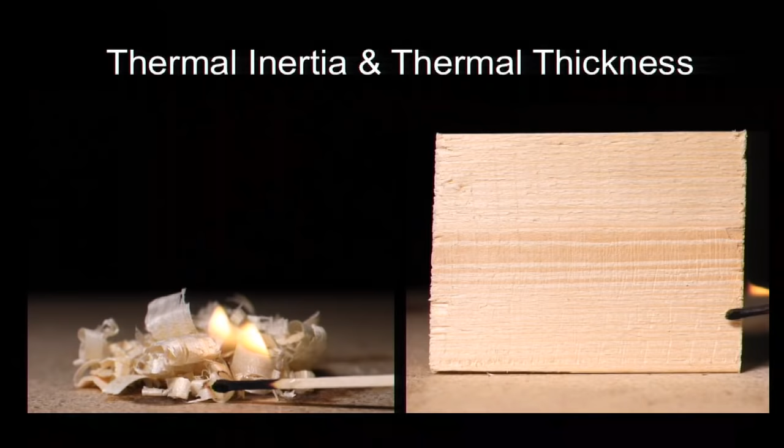The difference between these two cases, as regards both ignition of a material and the chances that it will continue to burn, are shown in these side-by-side videos of wood shavings and a block of wood, in both cases ignited by a match. And I'll play this now. And you can see actually multiple attempts to ignite the block of wood with subsequent matches.

You get the point, I hope. For a thermally thick fuel, when exposed to a heat source, the surface temperature of the solid material will begin to increase. The rate of increase is determined in part by the physical properties of the material.

The key parameters in this situation are, first, the thermal conductivity of the material. This is a measure of the ability of the material to transfer thermal energy internally by conduction. Second, the density of the material, and this is a measure of the material's mass per unit volume. And third, the material's specific heat capacity. And this is a measure of the amount of energy required to increase the temperature of 1 kilogram of the material by 1 degree Celsius.

A heat transfer analysis can show that the product of these three parameters, thermal conductivity multiplied by the density multiplied by the specific heat, governs the rate at which the surface temperature of a solid material increases when exposed to a heat source. This is called the thermal inertia of the material. And it represents, if you like, the ease with which the surface temperature of a material will change when exposed to heating.

However, the heat of combustion on its own does not give any information regarding the rate at which energy is released after a material is ignited, nor does it account for the heat transfer processes that lead to ignition, the material geometry, or the physical changes that may occur, all of which also affect a material's burning behavior. To give you a sense of the variability of heats of combustion amongst materials, this chart shows the heats of combustion of a number of familiar and not so familiar but relevant materials.

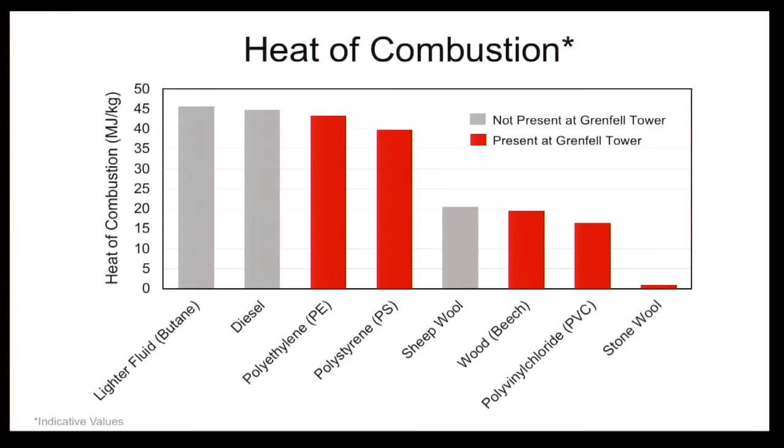Materials with gray bars are common and in some senses familiar, but are not considered significant as regards my preliminary evidence related to the Grenfell Tower fire. These are shown because these materials may be familiar to you, you may have some understanding of how they react to heating. Whereas materials in red are less familiar, aside from wood, of course, but were present in significant quantities within the cladding system at Grenfell Tower. You may note the broadly similar values for the synthetic polymer or plastic materials, polyethylene and polystyrene, as compared with diesel fuel, for instance. I'll return to this point later on.

Next, heat release rate. As I've mentioned, the rate at which energy is released from a material, by which I mean whether the available energy is released quickly or slowly in a given set of circumstances, is described by the heat release rate. The heat release rate describes the rate of energy release per unit time as an object burns. Objects made from materials with the same heat of combustion may burn in very different ways once ignited.

At a material level, the heat release rate behavior is dictated to a large extent by the pyrolysis behavior of the solid material. If the material melts, such as in the case of the synthetic polymer material polyethylene, for example, then after ignition, the heat release rate will increase to an essentially steady value until virtually all of the material is consumed. And this is illustrated schematically in the left-hand figure shown here.

This is a key point, and I'll return to burning of polyethylene, which I abbreviate in some cases PE, later in my presentation. If, however, the material chars, such as in the familiar case of wood or the less familiar case of a thermosetting polymer foam insulation, which I will also return to later, then under most conditions there will be an initial period of high heat release followed by a period of lessening heat release rate. This is due to the formation of a protective char layer on the surface of the material, and this is illustrated in the right-hand figure shown here. The formation of the char layer decreases the rate of energy transfer into the material, and hence reduces the rate of pyrolysis and therefore the quantity of flammable gases produced.

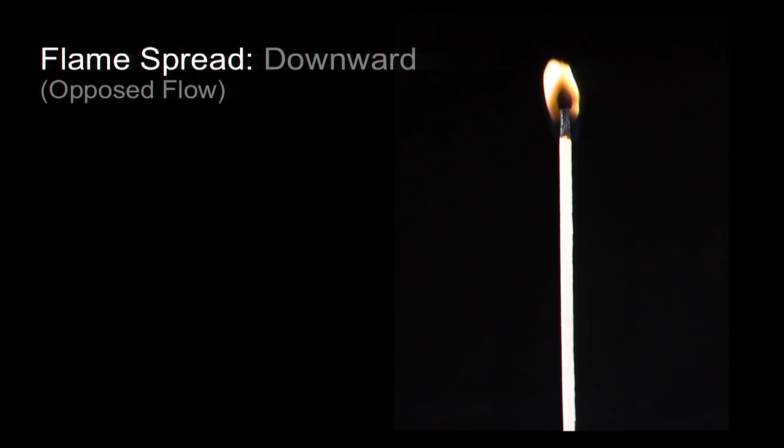And you can just see the flame creeping down the matchstick very slowly. And there you can see insufficient pyrolysis gases being released to sustain the flame.

A further special case of opposed flow flame spread is horizontal or lateral flame spread. This is similar to downward flame spread, and my next video shows the flame spreading from right to left. In this case, the rising hot gas draws air into the flame from left to right, hence referring to this as opposed flow flame spread, as in the case of downward flame spread.

The heat transfer from the flame to the match is higher than in the downward case, as evidenced by the spread of the flame horizontally along the match. In this case, the rate at which the pyrolysis front advances is approximately equal to the rate at which the solid fuel is consumed, as evidenced by a steady movement of the flame from right to left and a flame with a reasonably uniform size. And I'll show this here. And that flame just continues to the left and off the screen.

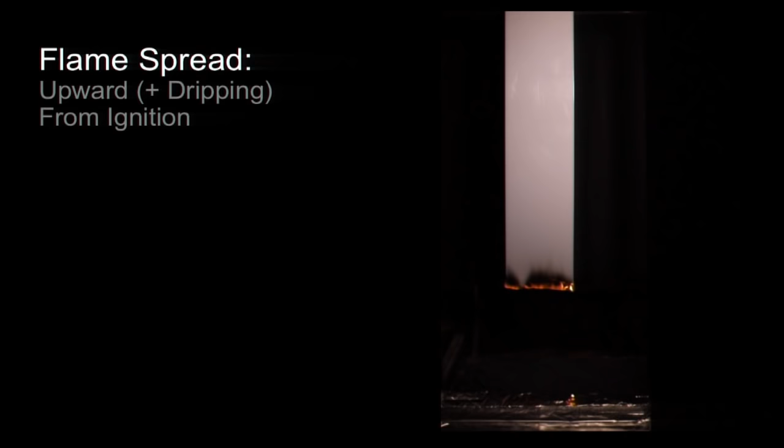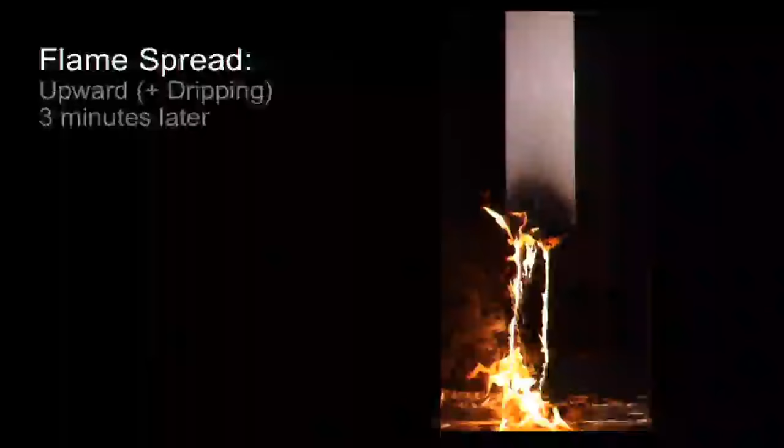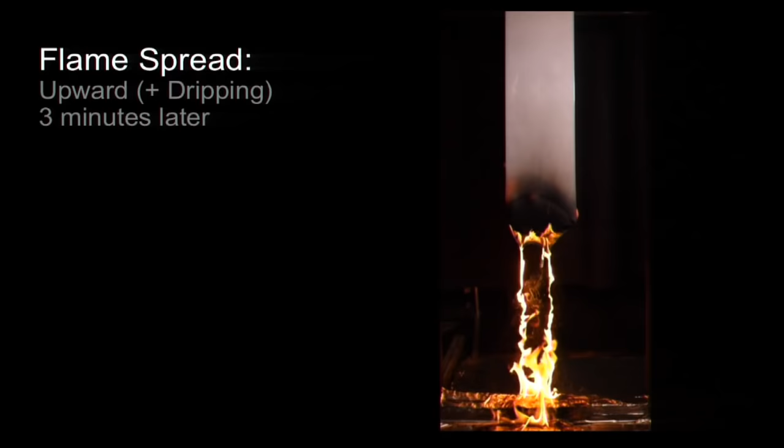In the second segment, which begins about 3 minutes later, we see that the sample is burning on both sides and that there is an almost constant flow of molten, burning polyethylene falling from the sample to the floor. And I should point out that the vertical streaks are rivulets of melted, burning polyethylene. In the third segment, which begins about 6 minutes later still, the sample has been significantly consumed and molten polyethylene continues to fall.

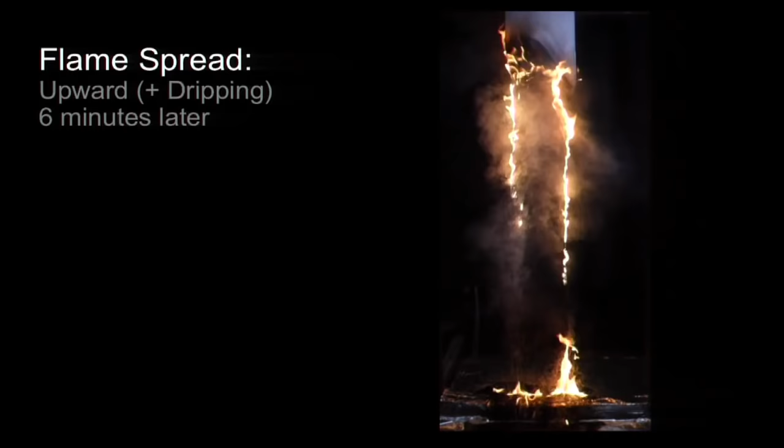The fact that polyethylene burns in this manner is not at all surprising. This behavior has been well known and documented in the scientific and technical literature for decades. This particular issue will become very important later in my presentation when I discuss the fire spread that was observed on the exterior of Grenfell Tower.

I've now spent considerable time discussing the most important fundamental fire science concepts and terminology relevant to developing a physical understanding of the circumstances of external fire spread during the Grenfell Tower fire. It is very important to note that my presentation of concepts such as ignition, burning, and flame spread relate primarily to single materials rather than to composite products. By this I mean products that are composed of a combination of materials, all of which may display substantially different flammability and flame spread properties.

I should also note that very little useful fundamental experimental data are available in relation to flammability and flame spread on composite products, since most of these products violate the basic assumptions of many of the existing experimental and compliance testing methods. And this issue is of particular relevance to this inquiry, not least because of the large number of other buildings in the UK and internationally that are apparently clad using similar materials and products to those used at Grenfell Tower. Despite this disclaimer, a series of useful conclusions can be drawn on the basis of the discussion provided in this first section of my presentation today.

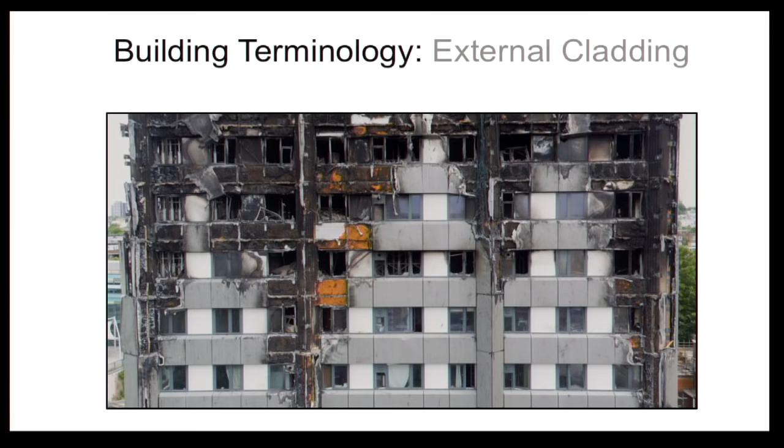This image shows a portion of the west face of the building following the fire. This photo was obtained by the Metropolitan Police Service using a drone on the 25th of July 2017. During my presentation, when I refer to columns, these are the areas of the building indicated on this image. I should like to point out that the east and west faces of the building each have 4 column lines, as shown here, whereas the north and south faces of the building each have 5 column lines, as noted by Mr. Millett during his opening remarks.

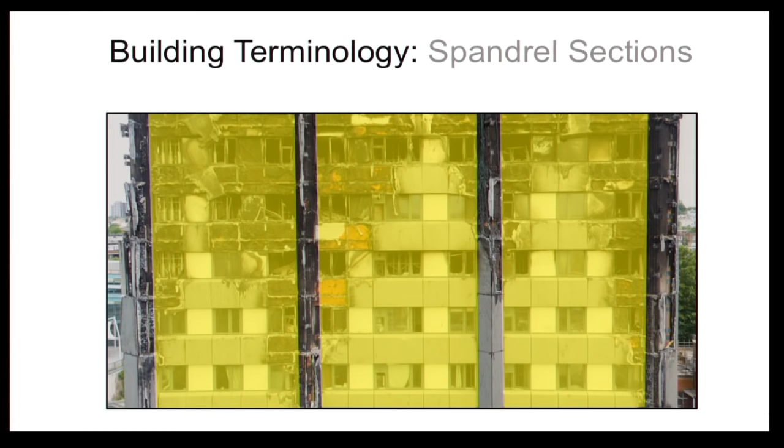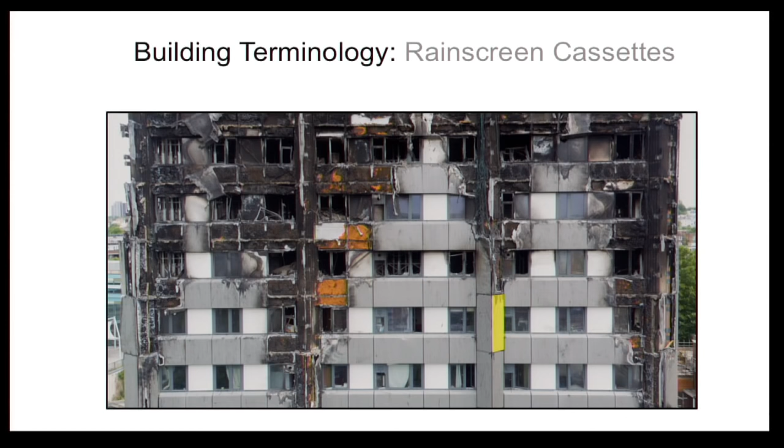When I refer to spandrels, this is a generic term that I use for the parts of the building between the windows, as indicated on this image. I also use the terminology spandrel section to refer to the building exterior between the column lines, the sections shown here. When I refer to rain screen cassettes, these are the external panels as indicated on this image. For example, here are spandrel section rain screen cassettes, and here on the column sections of the building. It's worth noting that these are gray in color from level 4 upwards.

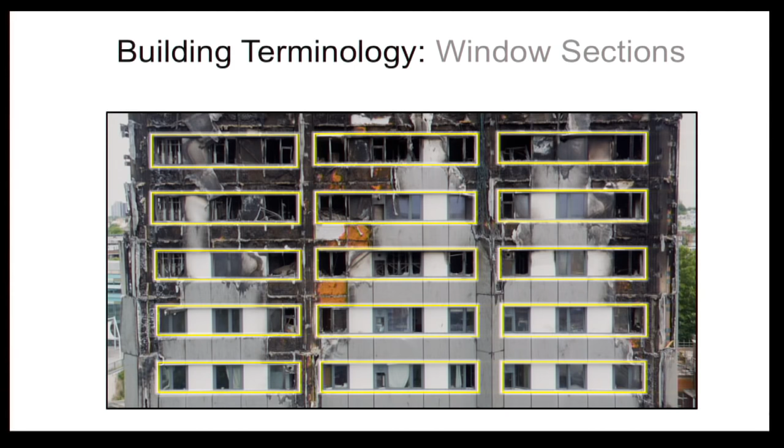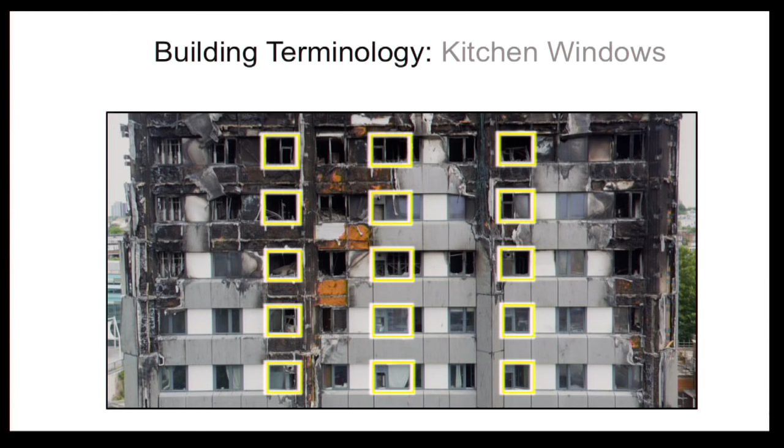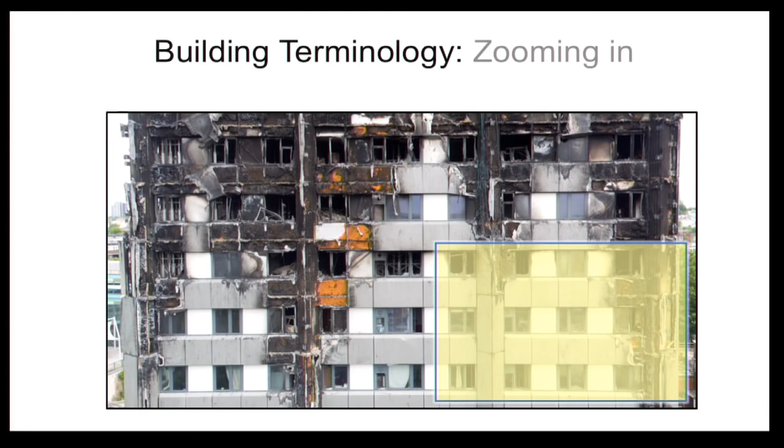I will now describe the cladding system and its geometry in more detail by zooming in on one specific part of the building, specifically the section shown of the building's exterior, which I'm showing here. This part of the exterior has the same arrangement of windows. Sorry, there it's zoomed in. This part of the building has the same arrangement of windows as those around the external east wall of flat 16, which is acknowledged by at least 3 of the inquiry's experts as the room of fire origin. The internal layout of this particular flat is also the same as that in flat 16, approximately, so that this is a kitchen window. The kitchen window is on the left, and the 2 rooms to the right of the kitchen window are associated with the living room.

I'll now zoom in even further to look only at the region around the kitchen window, which is shown as highlighted there. Here I've highlighted one of the kitchen windows in the vertical line of flats in the tower ending with the number 3. These are flats positioned in the southwest corner of the building. I will now zoom in even further to the kitchen window specifically.

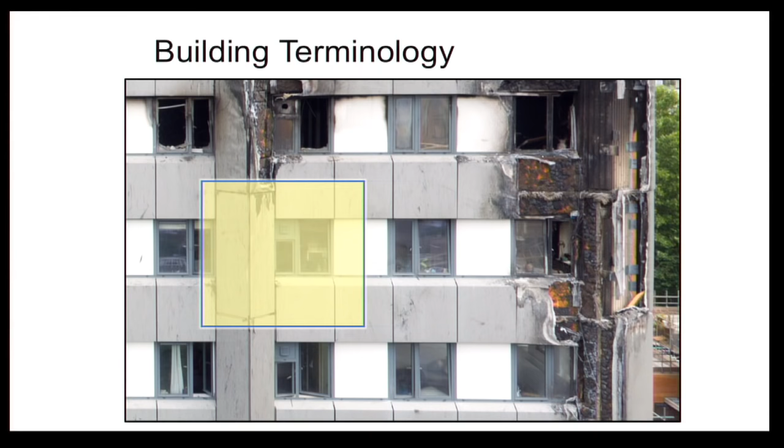The window comprises a large glazed window pane, which operates in both an inward tilting or inward turning, by which I mean swinging, manner, and hinged on the right when observed from outside the building. An extract fan, which is mounted within an infill panel, and this infill panel appears to be made from the same materials and construction as the window infill panels that I noted previously, and I'll come back to these in a moment. And a small glazed window pane beneath the extract fan and mounting infill panel, which operates in an inward turning manner and is hinged on the left when observed from outside the building.

I'd now like to look in some detail at the composition and geometry of the cladding in various locations around this kitchen window, which has the same design as the kitchen window of flat 16, as I've mentioned. To do this, I'll use my own hand-drawn sketches of the relevant sections through the building. And these are based on my own post-fire investigations at Grenfell Tower, and I'll do this in the hope that my sketches will be more easily understood by you and by the other parties to the inquiry.

I will necessarily be covering some of the ground already covered by Dr. Lane and Professor Nic Daéid. However, I believe that this is a useful repetition and that a detailed focus on the cladding materials and geometry is warranted under the circumstances. It should be noted that my sketches are only indicative and are not to scale.

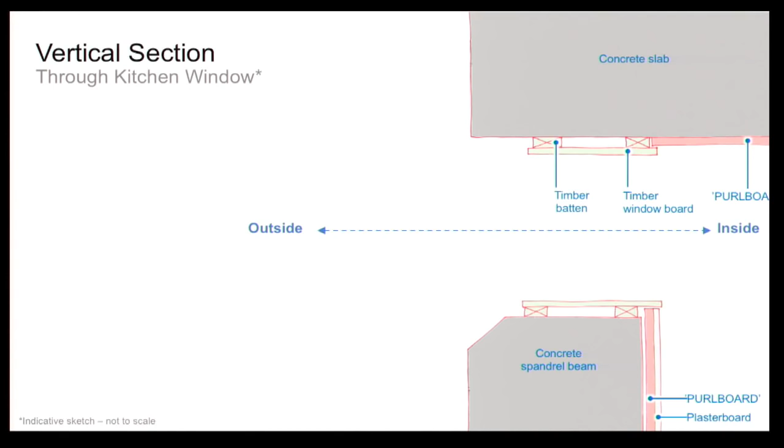and installed over top of this original construction was the refurbishment overcladding system. This comprised supporting aluminium rails and fixings, which were anchored into the pre-existing reinforced concrete floor slabs and spandrel beams. The polymer foam thermal insulation was applied in 2 layers on this section of the building, each 80 millimeters in thickness. And the aluminium composite material, or ACM, rain screen cassettes were then applied. Between the rain screen cassettes and the foam insulation was an open ventilated void, hence the terminology ventilated rain screen cladding system, to describe this particular type of cladding.

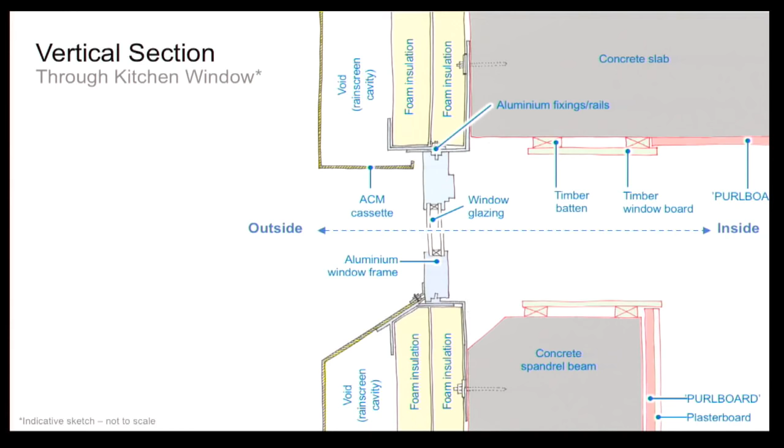And I'm referring to the voids shown with writing there. The new aluminium framed double glazed windows, extract fan units, and window infill panels were fitted into the openings and mounted on the aluminium rails, as shown here. And you can see here how I've cut and reduced the vertical size of the window. Inside the building was placed some additional polymer foam insulation in approximately those locations, and a finishing detail of a UPVC window board, which was bonded in place using a polymer adhesive, as shown there. Any small visible gaps were then filled with a silicone sealant.

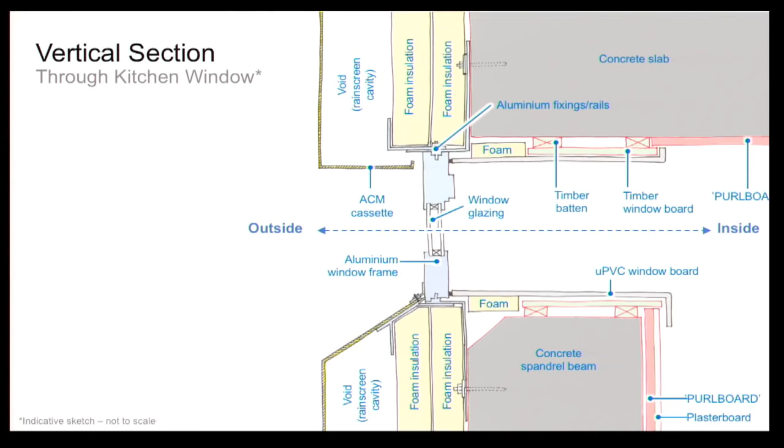UPVC stands for unplasticized polyvinyl chloride and is a specific type of polymer, i.e. a plastic, material that I will describe in more detail later in this presentation. We will look at each of these materials and products in more detail in a moment, but for now I simply wanted to show their locations within the cladding. Please note that the location of the glazing has been moved outwards as a consequence of the recladding, and that the windows themselves now sit some distance outside the original reinforced concrete construction.

I'd now like to take a horizontal slice through the building and look at the cladding build-up immediately to the left of the kitchen window when viewed from outside the building, at this location here. When viewed from inside the building, this slice is across the window as shown in this image. Please note that the dark material on the windowsill in this photo is debris from the fire.

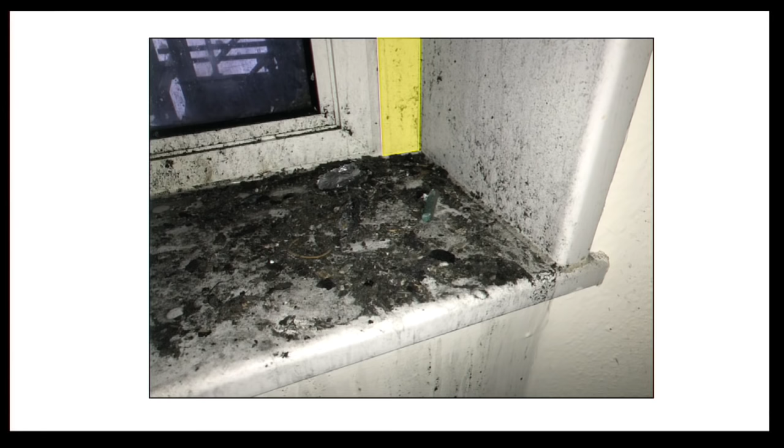This is a partially fire-damaged flat. In this photo, the UPVC window boards are clearly visible, as are the lines of silicone sealant used to fill the gaps between them, here. Please also carefully note this thin strip of UPVC window board, now highlighted in yellow. This has been installed in order to fill what would otherwise be a gap between the new refurbishment window frame and the pre-existing window opening within the original reinforced concrete facade, as I'll show in a moment. This appears to be held in place with a bead of silicone sealant.

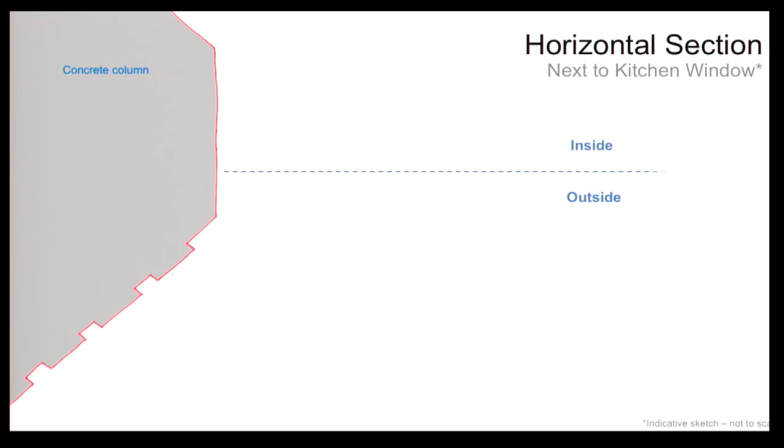Cutting through the wall of the building at this location and looking from the top down, you can see a portion of the octagonal-shaped reinforced concrete column on the left side of this sketch. Inside the building is at the top of this slide, and outside the building is at the bottom. Again, the original construction included timber battens and timber window board, and the original single glazed windows within aluminium frames. Here the line showing the glazing fades at the right, and this is to indicate an indefinite distance in this direction in my sketch, so the window continues off to the right.

As before, the original windows were removed, and the new double glazed windows were installed on the horizontal aluminium rails, which I showed previously, but which are not shown in this view. In this location, to the left of the window, i.e. on the column, the overcladding comprised the polymer foam thermal insulation, in this case, a single layer, 100 millimeters thick, and the ACM rain screen cassette.

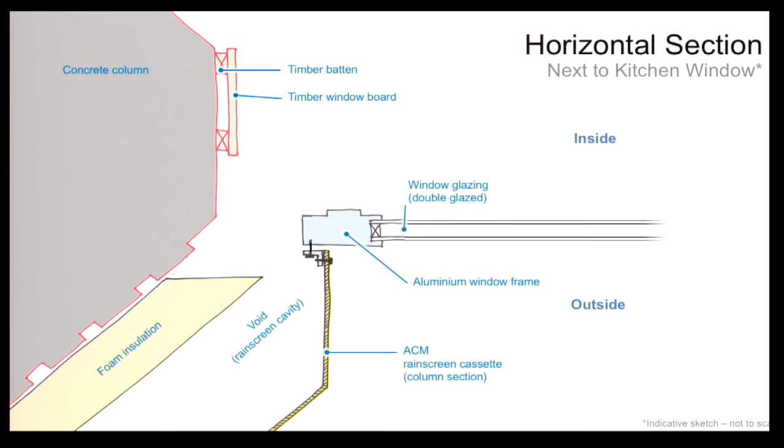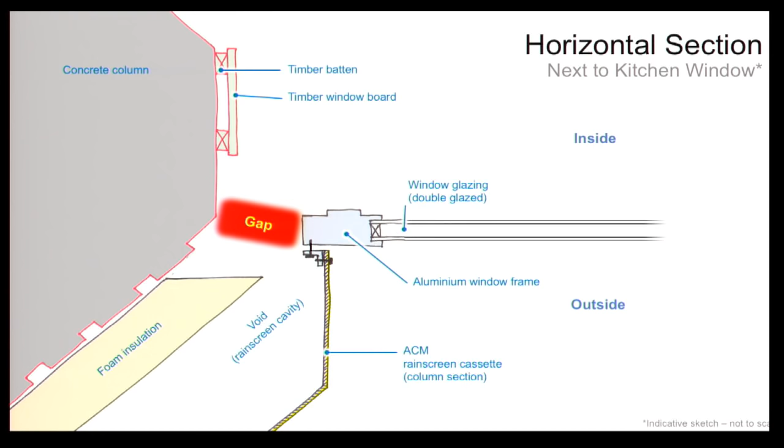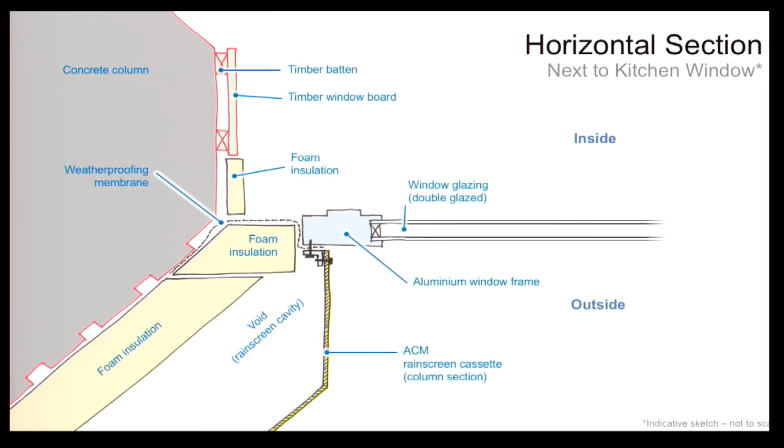As highlighted a moment ago, in this location, there was a gap between the edge of the new window frame and the pre-existing reinforced concrete column. There's a void in the rain screen, and that is not the gap that I'm referring to. A weatherproofing membrane made of EPDM rubber sheet was positioned across the gap formed in this location. Foam insulation was present both on the inside and outside of this gap, as shown there. And the UPVC window board was again applied as an internal finish, as shown there.

I should like to note at this point that the specific geometry of the small section of polymer foam insulation directly outside the kitchen window, which is now highlighted, appears to have varied over the building. In some cases, the insulation boards were cut differently at this location. And in some cases, the smaller pieces of foam insulation immediately outside the EPDM rubber membrane appear not to have been installed at all. This is important as regards potential routes for fire spread from inside the building to the cladding. As I will discuss later today, this is an ongoing item for investigation.

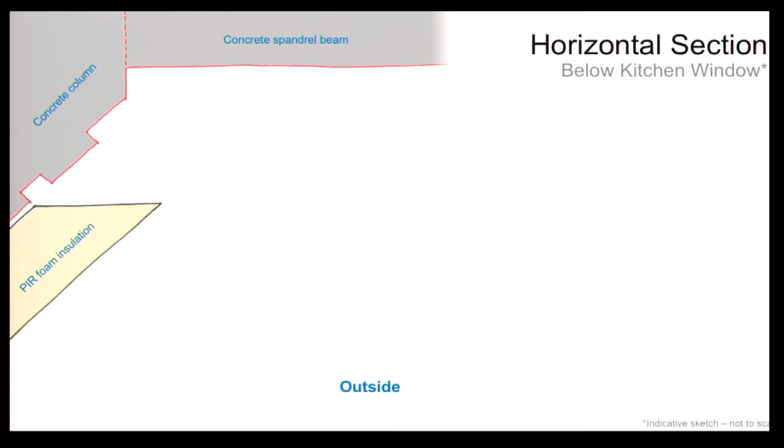Moving lower down to the spandrel section of the exterior cladding below the kitchen window, I will now take a horizontal slice across this part of the building, in this location shown here. In this location, again, looking down at the surface of my slice through the building, we can see the original concrete column and spandrel beam. Here, again, the spandrel beam fades at the right to indicate that in reality it continues to the right. There are 1 or 2 layers of PIR foam insulation, depending on the location on the building. On the columns, 1 layer was present with a thickness of 100 millimeters. This is shown here. Whereas on the spandrel, as I've already noted, 2 layers, each of 80 millimeters in thickness, were present.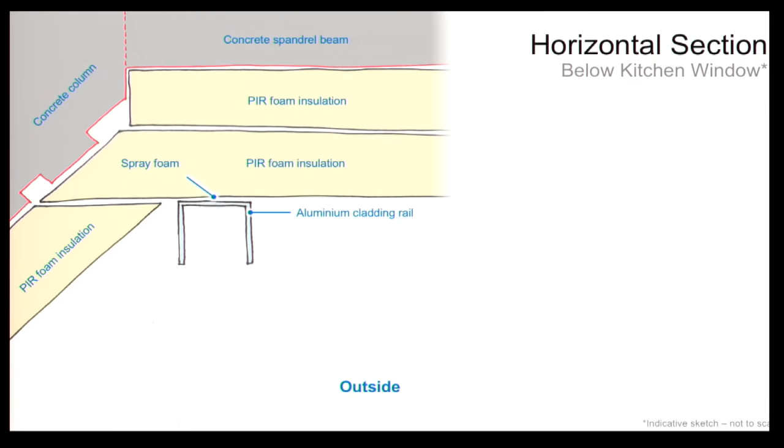Aluminium cladding rails, shown here, support the spandrel ACM rain screen cassettes, as was described in detail by Dr. Lane on Monday. These were attached to the refurbishment window frames using a series of metal brackets not shown in this view. And here are shown the connection to the ACM rain screen cassettes on the cladding rails. Spray foam was used liberally to fill gaps and small voids within the external cladding system. Aluminium tape also appears to have been used liberally within the cladding.

And finally, the ACM rain screen cassettes were hung from the cladding rails. And again, please note the void within the cladding between the rain screen cassettes and the PIR foam thermal insulation. I'd now like to draw your attention to a particular feature of the cladding geometry that exists along the vertical line where the spandrel sections of the building meet the column sections of the building.

Remembering the 2 horizontal sections that I've just taken through this location and where they're positioned in the building, both through the window section and through the spandrel section, which is shown here, I've identified that a continuous vertical void exists within the cladding at the location shown in this figure. This void is continuous on all columns from level 4 all the way to the top of the tower.

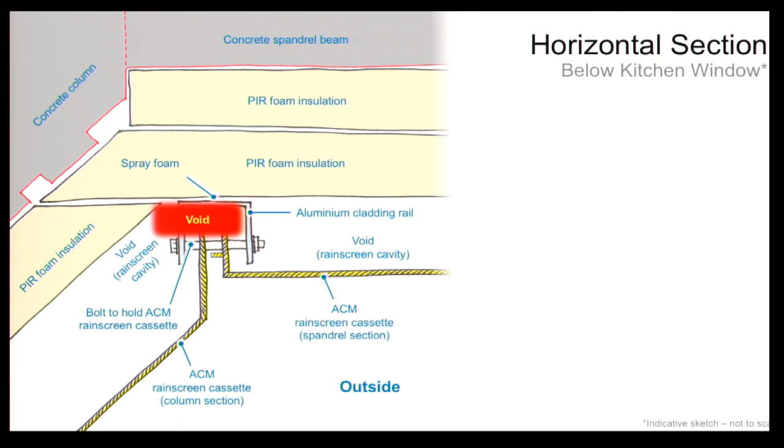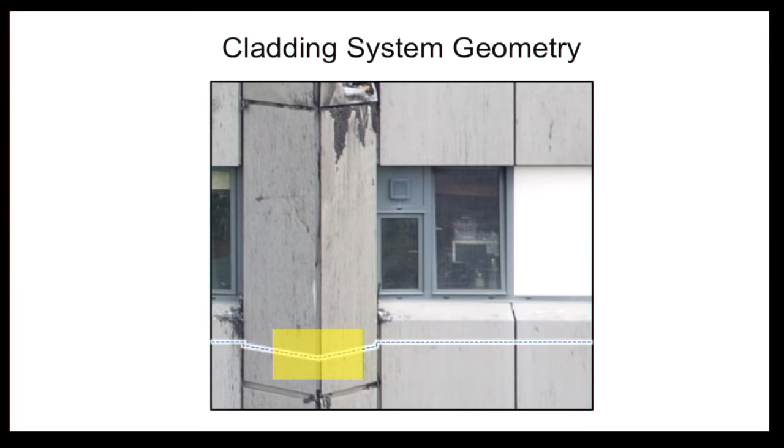The final part of the cladding that I'd like to examine in detail is at the location that I have called the column tip in my Phase 1 report. This is highlighted in yellow in this figure. I wish to highlight this both for completeness and because of another particular feature of the cladding geometry at this location, that location just there.

This image shows a sketch of a horizontal slice across the column tip, as shown by the dashed line in the previous slide, and again looking down at the surface of my slice. The tip of the original concrete column's external precast concrete surface is seen in gray. The overcladding in this location comprises the aluminium fixings and rails, shown here, the single layer of foil-faced PIR foam insulation, 100 millimeters in thickness, and the ACM rain screen cassettes, again with a ventilated rain screen cavity.

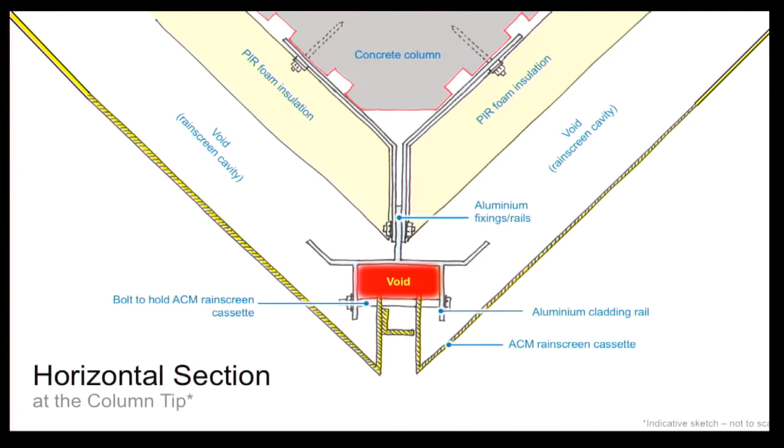Having dealt with the geometry, I will now describe the various materials and products that were present within the cladding system of Grenfell Tower at the time of the fire. Before I begin, I believe it's important to make clear a distinction between materials and products. Materials are comprised of, well, a single material. Products, on the other hand, can be comprised of multiple materials.

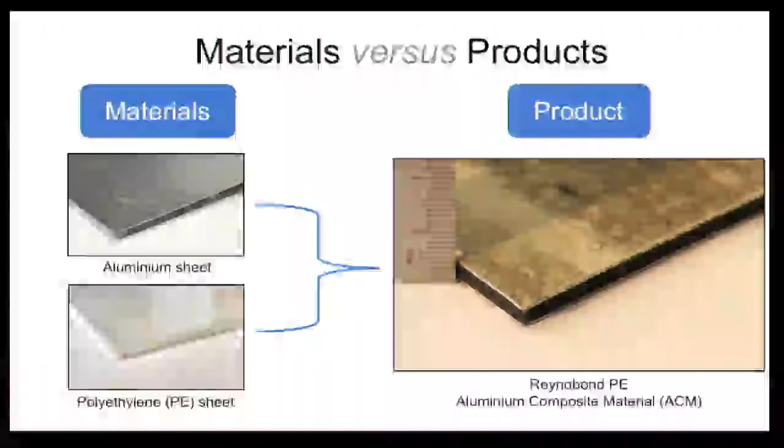For example, aluminium is a material, and polyethylene is a material. However, Reynobond PE, shown here for instance, is a product consisting of 2 aluminium sheets separated by a gap which is filled with polyethylene. Even at this early stage of the inquiry, Reynobond PE will no doubt be familiar to you, and I will discuss this product in more detail in a few minutes.

It has been common to refer to Reynobond PE and similar rain screen products as aluminium composite materials, or ACMs. The use of the word material in this context is, in some ways, a misnomer. However, because the word composite precedes the word material, the name tells us that this is actually a product consisting of multiple materials. Another example of a product is Celotex RS5080, which is shown here.

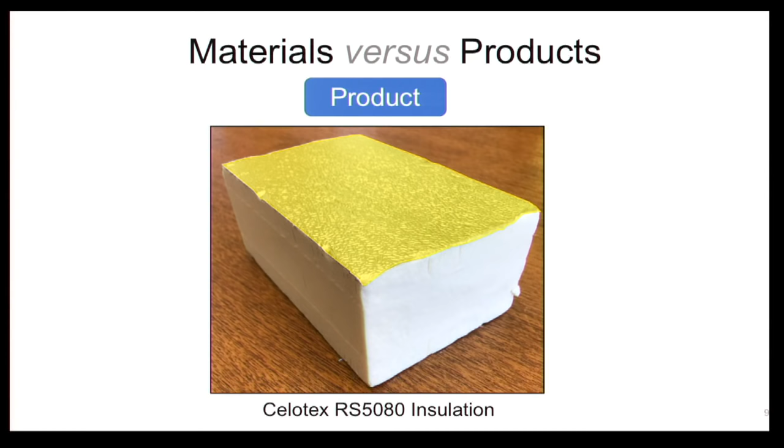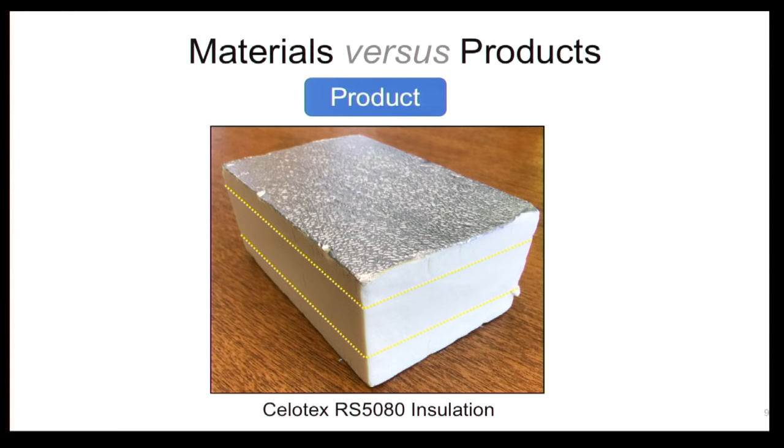This product is composed of several materials: polyisocyanurate, or PIR foam, which is highlighted here, a thin aluminium foil facing, which is shown here and is on both sides of this material, and a glass fiber mesh, which sits within the PIR foam, as indicated by the lines shown here. I will also return to the product Celotex RS5080, which is part of the Celotex RS5000 range of insulation products, later in my presentation.

With this distinction between materials and products made, I will now move on to describe the different cladding materials and products used on Grenfell Tower and their respective locations within the cladding system. And I apologize, this does get a bit repetitive in this section of my presentation.

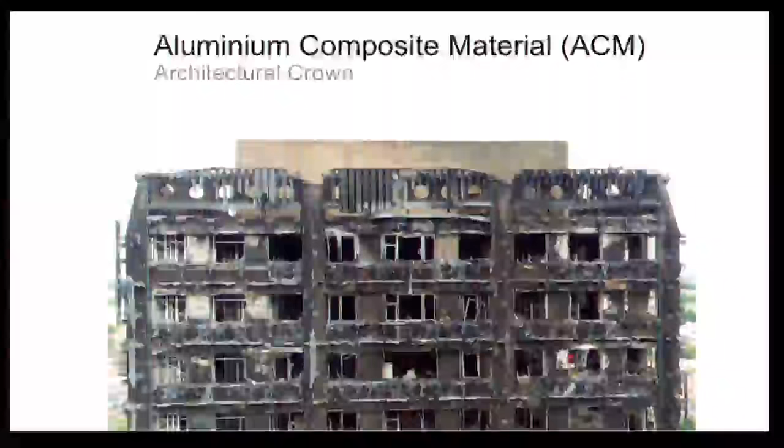The specific geometry and materials of the architectural crown are discussed in detail in my Phase 1 report and will be the focus of considerable additional work at Phase 2. For my presentation today, it's sufficient to note that the architectural crown was comprised largely of closely spaced, vertically oriented, C-shaped channels formed from ACM panels. These were mounted on closely spaced aluminum rails, which were supported off the original reinforced concrete parapet beams at roof level.

As we heard on Monday, the ACMs at Grenfell Tower were a product called Reynobond PE, where the PE stands for polyethylene. This was and is manufactured and sold by Arconic Architectural Products. This image shows the corner of a Reynobond PE panel taken from Grenfell Tower after the fire and provided to me by the Metropolitan Police Service. It is comprised of a 0.5 millimeter thick aluminium outer surface, which is bonded to a 3 millimeter thick polyethylene filler material and a 0.5 millimeter thick aluminium inner surface.

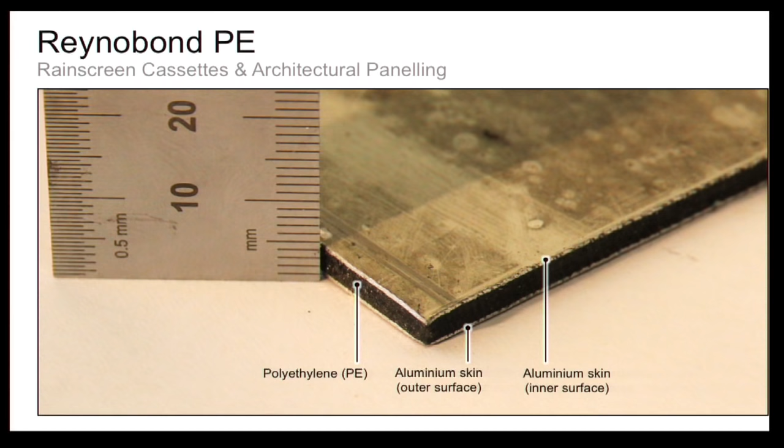To form the product into rain screen cassettes, flat sheets of the material are cut and folded. This image shows various different cuts and folds in a typical ACM rain screen cassette taken from Grenfell Tower after the fire, and again, provided to me by the Metropolitan Police Service. I would like to draw your attention to the exposed edges of black polyethylene material that this image reveals. This image is showing the back of a typical rain screen cassette, by which I mean it is showing the face of the cassette that would have been looking into the ventilated rain screen cavity. The black areas in this image therefore present surfaces of polyethylene that would be directly exposed to any flame or heat within the cladding cavity, should a fire penetrate by essentially any means into the cladding system.

Two different colors of polyethylene are present in the Reynobond PE ACMs used on Grenfell Tower: the black polyethylene that I've shown here, or a light-colored translucent polyethylene, which I've not shown. Testing will be undertaken at the University of Edinburgh to assess if there are any discernible differences between these two different colors of polyethylene in terms of their reaction to fire.

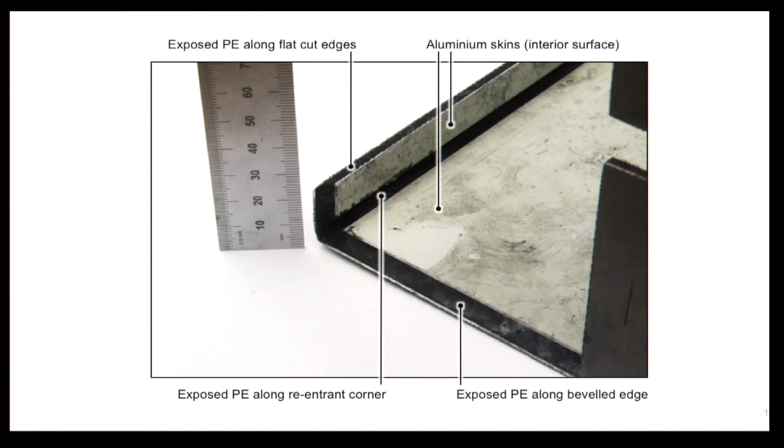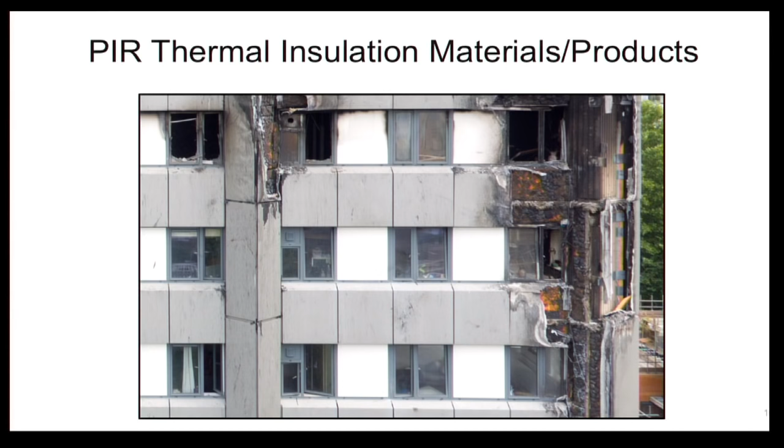Next, I'd like to look at the PIR foam insulation products that were used at Grenfell Tower, where PIR again stands for polyisocyanurate. Some of these products are also visible in this image, in the locations where the ACM cassettes, again, have been damaged or removed by the fire. For instance, we can see some insulation here and here. Most of the PIR foam in this photo has had its external aluminium skin removed and has been charred on its outer surface during the fire, thus having a darkened, cracked, blackened appearance. This charring behavior is significant as regards the manner in which PIR foams may burn, and I will return to this point later in my presentation.

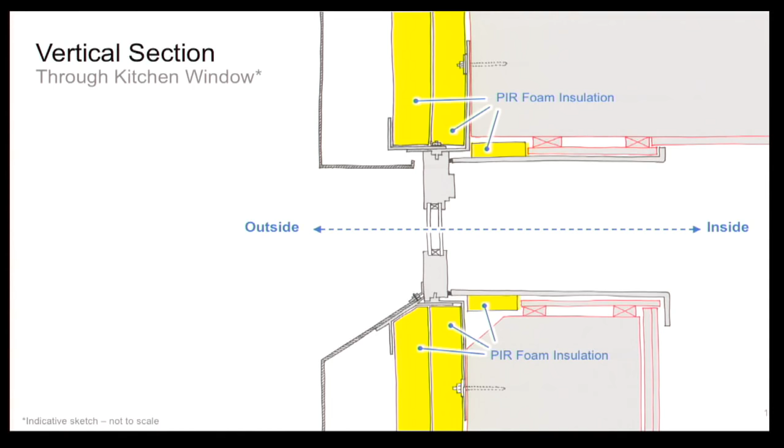Just to remind you, the locations of the PIR foam on my sketches of vertical slices through the building are illustrated in yellow here, where you can see where PIR foam is located both above and below the window and within the window surround. And again, here around the column to the left of the window in my horizontal slice.

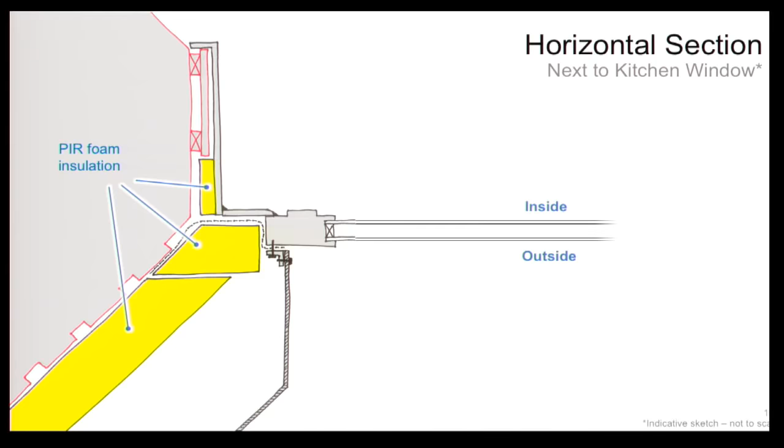This image shows a piece of the PIR foam taken from one of the columns at Grenfell Tower, and again provided to me by the Metropolitan Police Service. Visible in this photo are the PIR foam, which is yellow in color, and one of the foil faces. I should note that the bottom surface of this product also has a foil face, but it's not visible in this photo. This insulation product is manufactured by Celotex under the generic product name RS5000. The specific product name is Celotex RS5100, where the last three digits, 100, correspond to the thickness of the product in millimeters.

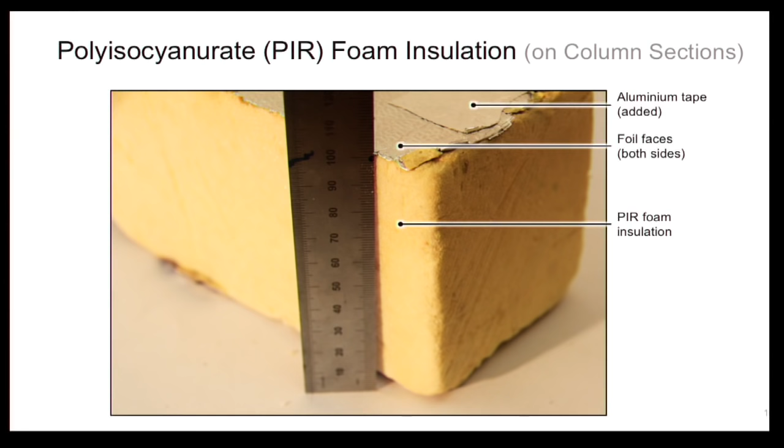This image shows a piece of PIR foam insulation that was taken from one of the spandrel sections at Grenfell Tower. Again, visible are the PIR foam, again yellow in color, the foil faces, again top and bottom, and in this particular product, a glass fiber weave within the PIR in 2 layers, as noted earlier. This product is also from the Celotex RS5000 PIR insulation product range, and at Grenfell Tower, this product was anchored to the concrete spandrels in 2 layers, each of 80 millimeters thickness, as I've mentioned. The specific product name is therefore Celotex RS5080, where again the 80 represents a product 80 millimeters thick.

Also on this photo, we can see some of the polyurethane polymer spray foam that was present in comparatively small volumes, I should say, in many locations within the cladding. In addition to the PIR insulation identified during post-fire inspections at Grenfell Tower, phenolic foam, or PF insulation, has also been found on some areas of Grenfell Tower.

This product, the phenolic product, which is not shown here, has been identified as Kingspan Kooltherm K15, and based on the available evidence accounts for only a very small proportion of the insulation and only on a small number of spandrel sections of the building. Two further PIR foam insulation products have been identified during my post-fire investigations of the undamaged and partially damaged sections of the building.

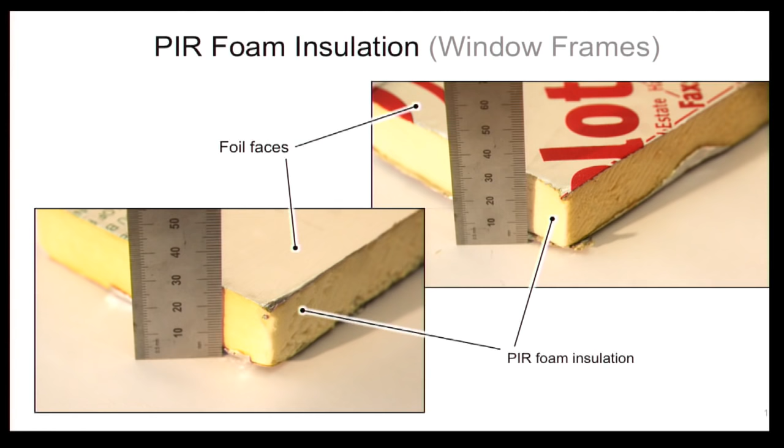These were located around the window framing of the refurbishment windows, as I've mentioned, and are shown in this photo, again provided to me by the MPS. A 25 millimeter thick foil-faced PIR polymer foam insulation board manufactured by Celotex. This is shown top right on this slide and has yet to be definitively identified. And a 25 millimeter thick foil-faced polymer foam insulation board manufactured by Kingspan. This is shown bottom left. The specific product name is yet to be confirmed, although based on its markings, it is likely to also be PIR foam and from the Kingspan Therma product range.

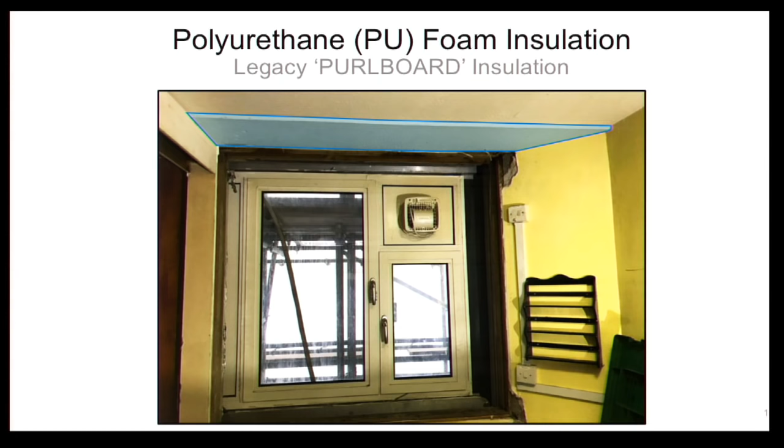I've previously mentioned an insulation product called Purlboard. This appears to have been part of the original construction of Grenfell Tower and was located inside the building, both above the window on the ceiling, as shown here, and in a continuous band around the perimeter of all flats, and below the window on the inside face of the reinforced concrete spandrel beams. These locations are indicated here in my vertical slice through the cladding. The Purlboard insulation is a polyurethane foam board. The product is approximately 13 millimeters thick and is faced on both sides with a paper covering.

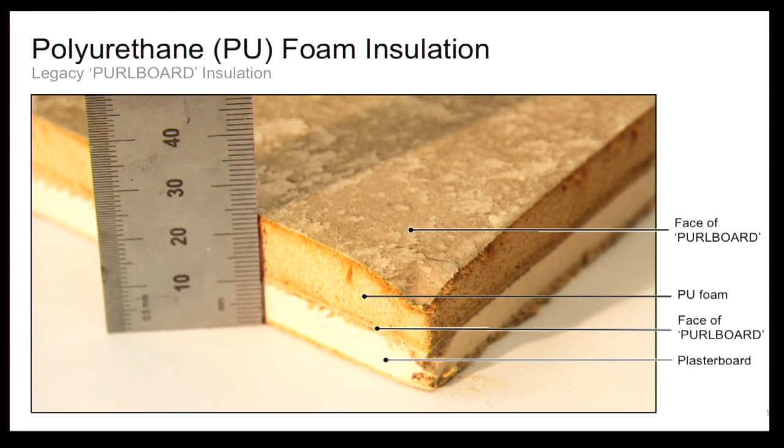The Purlboard on the internal wall of the spandrel sections was, as already noted, adhered to a layer of plasterboard, as shown in this photo, with the Purlboard being the top portion of this sandwich and the plasterboard being the bottom. I've not yet been able to determine if the Purlboard on the ceiling was also faced with a layer of plasterboard, as I've been prevented from disturbing this product due to an apparent asbestos risk associated with the Artex plaster on the ceilings.

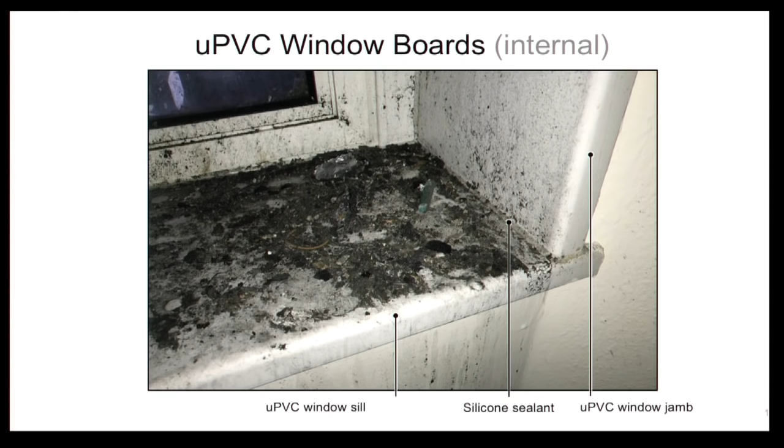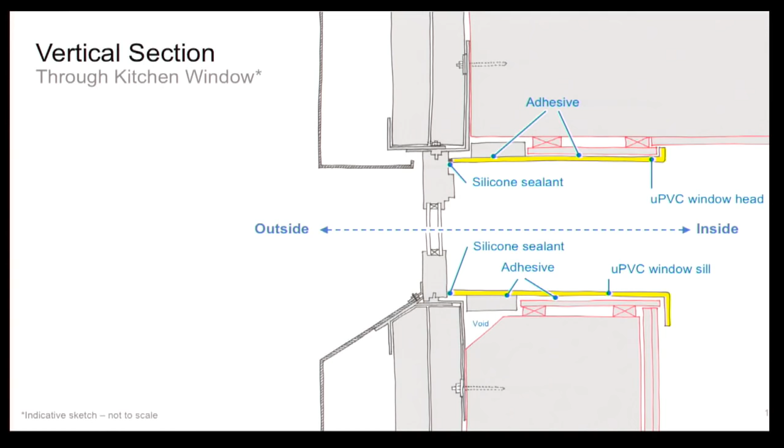Around the windows are UPVC window framing boards that form the final internal finish of the refurbishment cladding system. The location of these UPVC boards is indicated in this image. Here, here, here, here, and importantly, as I've already mentioned, here in a thin strip. This image, which I've shown previously, shows a portion of a UPVC horizontal window sill and the vertical UPVC window jamb, by which I mean the side of the window enclosure, after the fire. This is shown in my vertical slice, again in yellow, above and below the kitchen window, as shown here. And again here in my horizontal slice at the side of the kitchen window.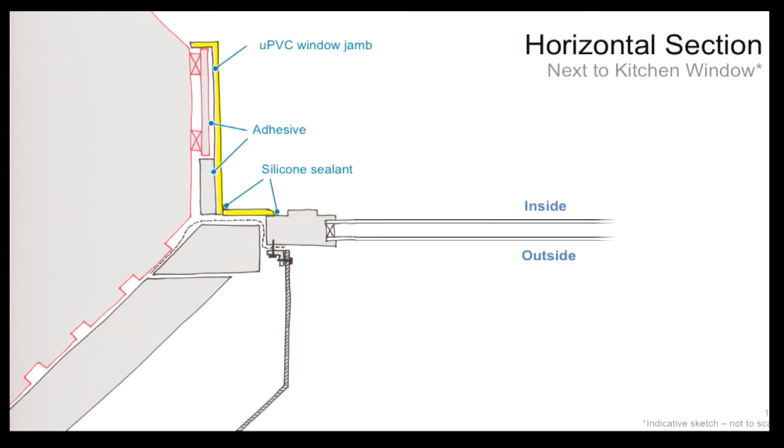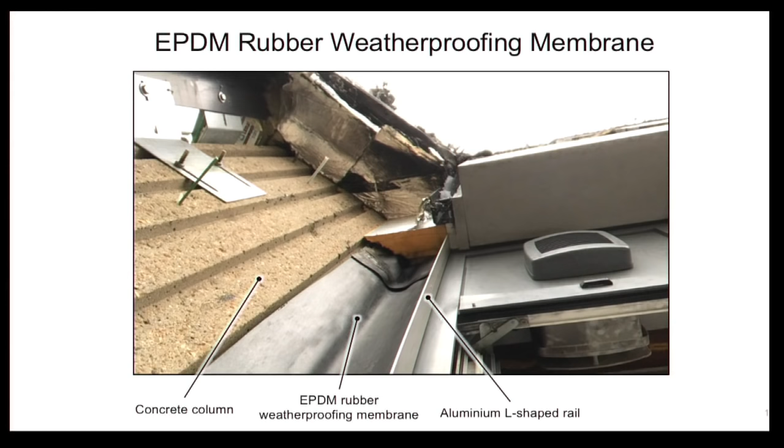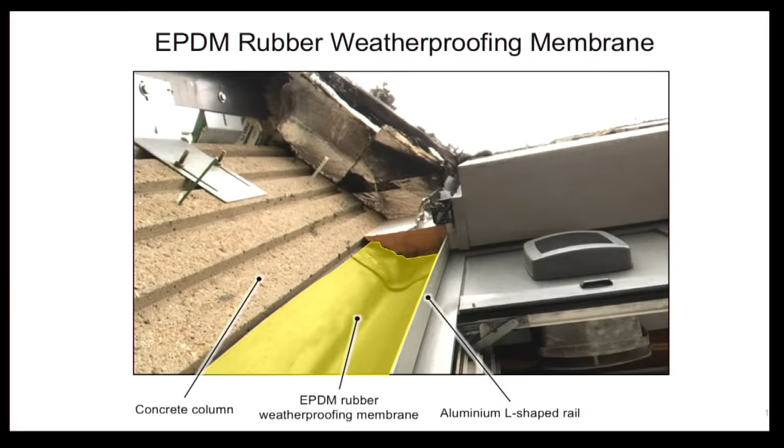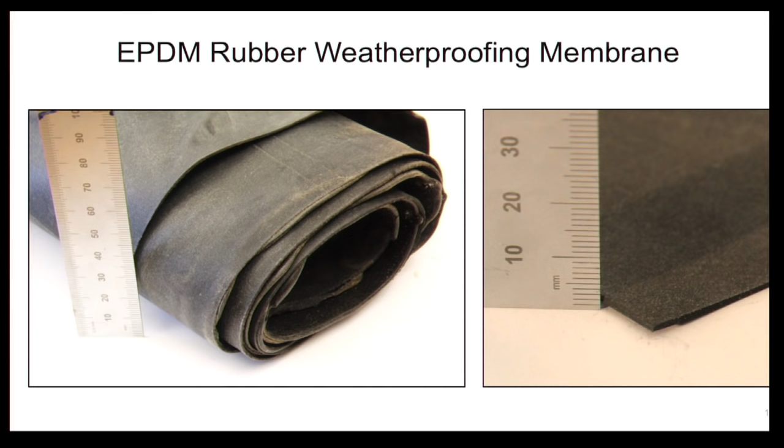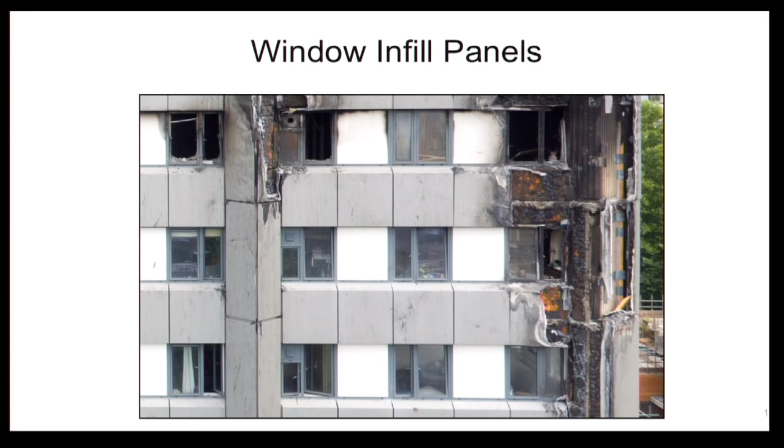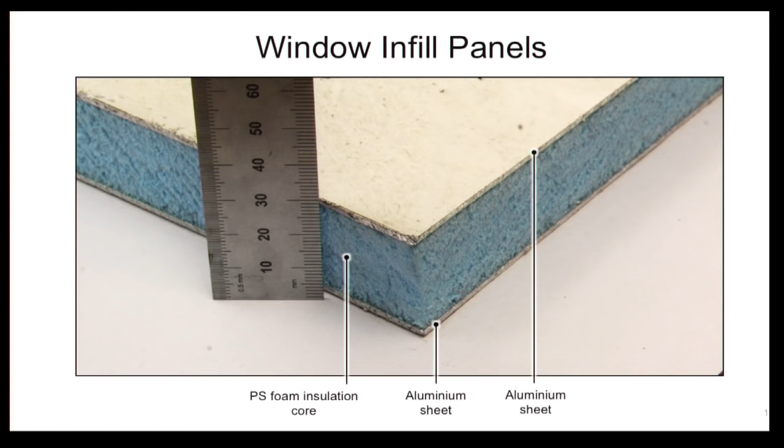That concludes my presentation of preliminary evidence as regards the geometry and materials of construction of the refurbishment cladding at Grenfell Tower. In the final section of my Part 2 presentation, I'd like to briefly describe the burning behavior of some of these materials.

In discussing specific material burning behavior, which includes flammability, ignition, etc., I will focus on those materials which I consider to be most important with respect to the Grenfell Tower fire. Please note that I'm using the word materials intentionally here.

At this stage of the inquiry, I will avoid commenting on the burning behavior of products other than to reiterate my previous statement that very little useful fundamental experimental data are available in relation to the burning behavior of composite products, since most products, again, violate the basic assumptions of many of the existing experimental and compliance methods. The discussion below is therefore based on samples of pure material. By this I mean a single material in the absence of coatings, protective layers, or incorporation into composite products. And this is actually a very important point.

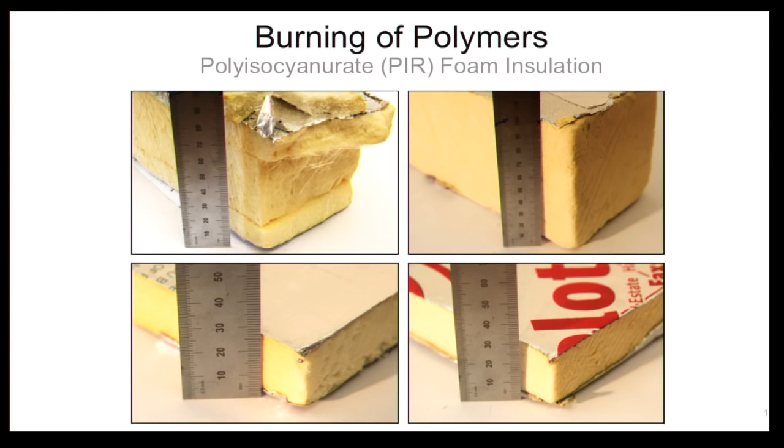Polyisocyanurate, or PIR foam materials, were also used in significant volumes within the cladding system at Grenfell Tower. This was as part of the 4 insulation products that I've already discussed and which are shown here. The PIR foam is again highlighted here in yellow, so makes up the bulk of these products. PIR is a synthetic thermosetting polymer, which is primarily produced as a rigid foam. It has a very low thermal inertia, which you'll remember I discussed earlier. Its material properties make it extremely attractive for providing thermal insulation in buildings.

However, the very low thermal inertia of PIR, as I've discussed already, means that it tends to have a comparatively low time to ignition and will support rapid flame spread without protection from an external barrier, for instance, an aluminium foil facing. The very low thermal inertia means that PIR may also accelerate flame spread of adjacent materials by preventing the loss of energy from the system. By this I mean by insulating, for example, the rain screen cavity and reducing losses, thus possibly accelerating fire spread. The difference in terminology is actually quite important.

The precise formulation of PIR foams varies by manufacturer, as does the manufacturer's use of different fire retardants. As a result, comparison between products in the available technical literature is not strictly possible. Nevertheless, to give you an idea of comparative hazard, the heat of combustion of PIR is about 26 megajoules per kilogram, or about 60% that of polyethylene. But this comparison must clearly be considered in light of my previous comments, noting the potential importance of other burning behaviors.

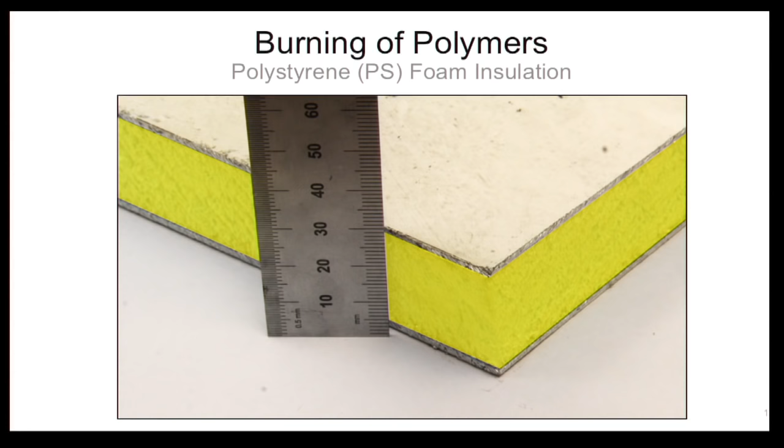Polystyrene foam is used within the core of the window infill panels at Grenfell Tower, as highlighted here. Polystyrene foam is a low thermal inertia thermoplastic polymer, and therefore rapidly melts at its surface when exposed to heat or flame. Once melted, polystyrene foam typically forms burning droplets or burns as a liquid pool. Its melting temperature is about 230 degrees Celsius, and its heat of combustion is about 40 megajoules per kilogram. Again, compare with polyethylene at about 46 megajoules per kilogram.

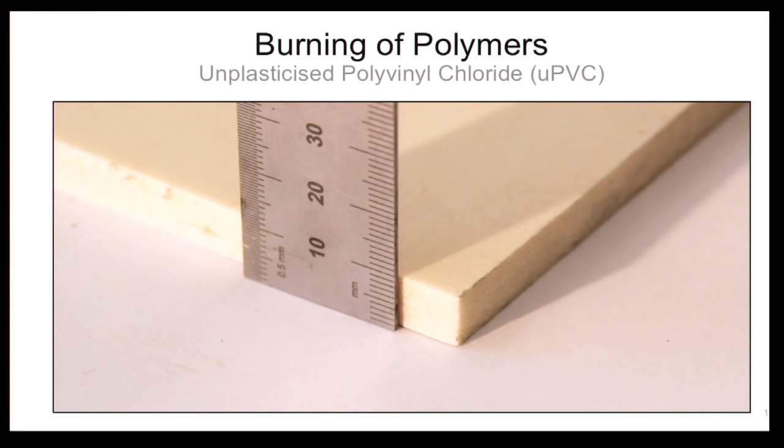Polyvinyl chloride, or PVC, is a synthetic thermoplastic polymer. With relevance to Grenfell Tower, I am discussing rigid PVC, commonly referred to as UPVC or PVCU. The U simply stands for unplasticized, meaning that the PVC is rigid at room temperature. Upon exposure to fire, UPVC may char. However, its particular chemical nature means that its heat of combustion is lower than for many other synthetic polymers. As a result, its ability to spread flame is also comparatively less than many other polymers. Its heat of combustion, for instance, is only about 18 megajoules per kilogram.

However, the temperatures at which UPVC will soften and experience significant reductions of mechanical properties are very low in comparison with other construction materials. As a result, typical day-to-day upper service temperature limits for UPVC are in the range of about 50 degrees Celsius. Its melting temperature is between 75 and 105 degrees Celsius. This is significant, highly significant in my view, in the context of Grenfell Tower, because, as I've already explained, UPVC window boards form the initial barrier for flames to prevent fire spread from the kitchen of flat 16 into the cladding cavity beside the kitchen window. This issue receives considerable attention in my Phase 1 report.

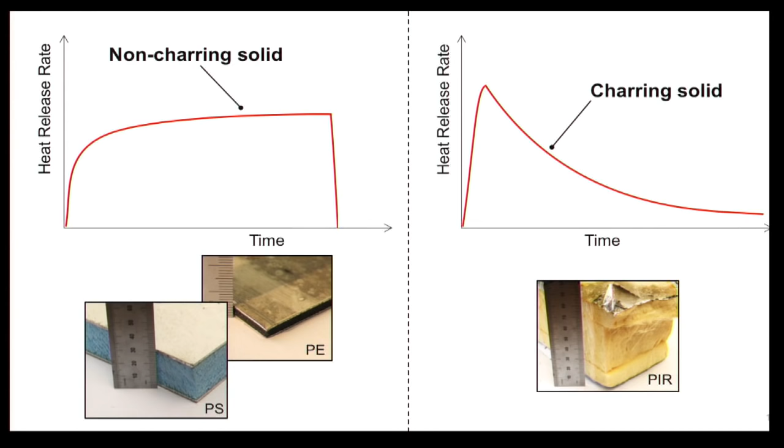All of these ideas will become important during this inquiry as we try to unpick the respective effects both of the geometry and of the materials and products present within the cladding system at Grenfell Tower. These issues are central to understanding what happened at Grenfell Tower and to ensuring that it can never happen again. And that concludes section 2 of my presentation. Thank you very much.

Mr. Chairman, thank you very much, Professor. This might be a convenient moment to take the midday break. I know that part 3, fire spread, will take a large portion of the afternoon, so it may be convenient to take an earlier lunch now. Yes. Whatever you're happy with. Well, you've been on your feet for quite a long time. Would you like a break now? Sure. Yes. All right. Well, we'll have a rather extended lunch break. If we resume at 2 o'clock, that'll give you plenty of time to finish your presentation, will it? Sure, should do, yes. Good. Well, that's what we'll do then. We'll rise now and resume at 2 o'clock. Thank you very much.